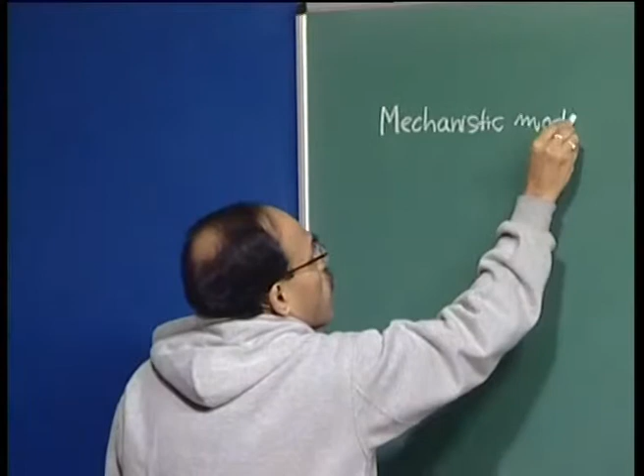Now, how many types of mathematical models do we generally encounter in steel making? Broadly speaking, we would say that we have a mechanistic model, and empirical models.

There are many subdivisions possible, because empirical models, for example, can be classified based on the standpoint from which they have been derived. For example, I can derive an empirical model purely based on regression analysis, a term I hope you've heard. On the other hand, I can derive an empirical model based on some dimensional reasoning or dimensional analysis, as well as some experimental data.

Finally, I can derive the empirical model also from the viewpoint of an artificial intelligence procedure or technique, such as applying genetic algorithms or artificial neural nets. So many further subdivisions are possible.

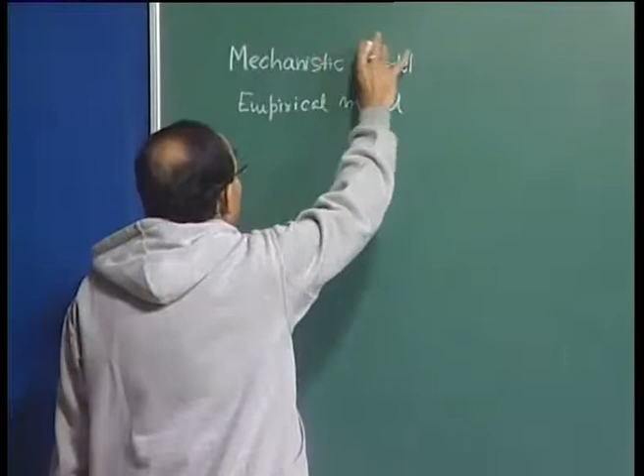Mechanistic models, for example, can be derived from various standpoints. These are basically based, as the name suggests, on certain conservation principles. People may subdivide mechanistic models further, and it has a different kind of connotation in the context of population balance, but nevertheless we would be talking about some conservation principle, some balance principle.

On the other hand, empirical models are derived purely from an experimental standpoint, embodying experimental data. The further subdivisions of mechanistic models I am not going to discuss here, as that is not of our immediate interest. We will consider models under only these two categories: either a mechanistic model or an empirical model, as far as we are concerned.

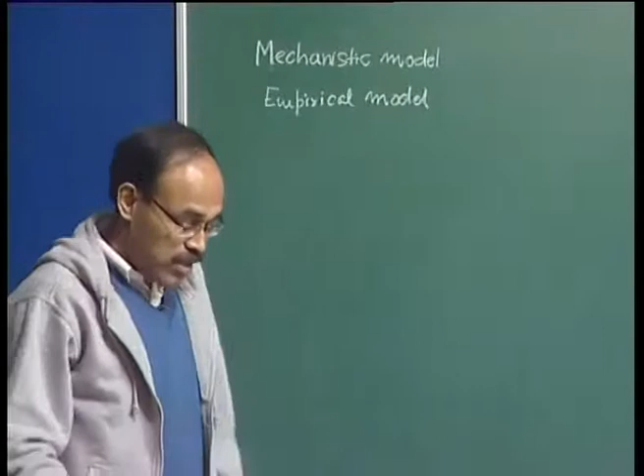Now, mechanistic models, for example, are based on the conservation principles. Conservation of what? Conservation of mass, conservation of momentum, conservation of energy, conservation of population balance, and all these kinds of concepts can be used to formulate the model.

Because mechanistic models are based on solid scientific principles, as the name itself indicates, the fundamental laws of physics these models are based on. Therefore, a mechanistic model formulated in India will equally work in other countries, provided we have been able to derive the model realistically.

But an empirical model which we may develop, which may be specific to a particular plant, may not work for all different plants, because empirical models contain experimental data points that are specific to a given plant or given set of conditions. So they lack universality. On the other hand, mechanistic models are sufficiently general, not governed by geographical boundaries, and they work across geographical boundaries, provided we can formulate them correctly.

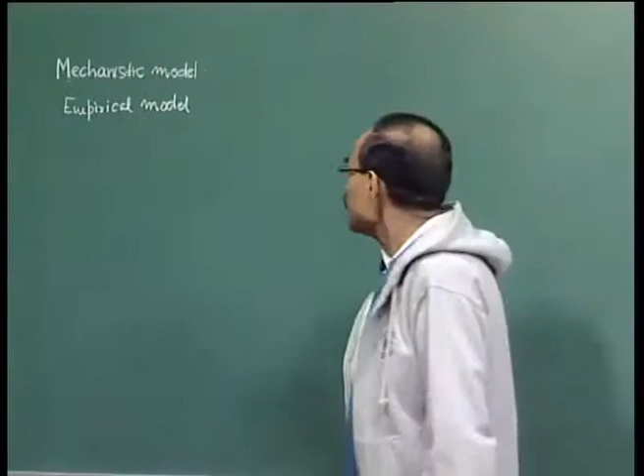For example, I can say that we can carry out a heat balance and write a heat conservation equation, which can be a very complex equation in terms of the geometry or the process itself, not a simple one-dimensional equation. So I can write a heat conservation equation and say that this represents the mechanistic model for a given process. Empirical models, on the other hand, basically look like algebraic equations, while mechanistic models most of the time will appear to us as partial differential equations. As we discuss this further, it will become clear to you.

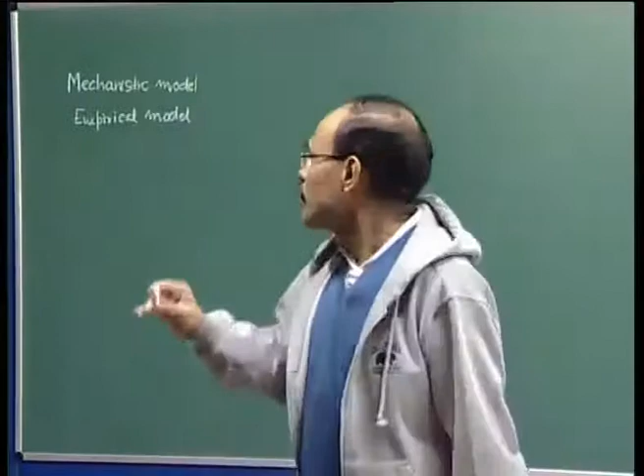Now, I have also indicated that when we try to develop a mathematical model, we have to first define the problem, what we want to develop. So merely saying I want to develop a model for a ladle, or for continuous casting, is not enough. The foremost, the most important task, is the problem identification or problem definition. This is the first step in mathematical model building.

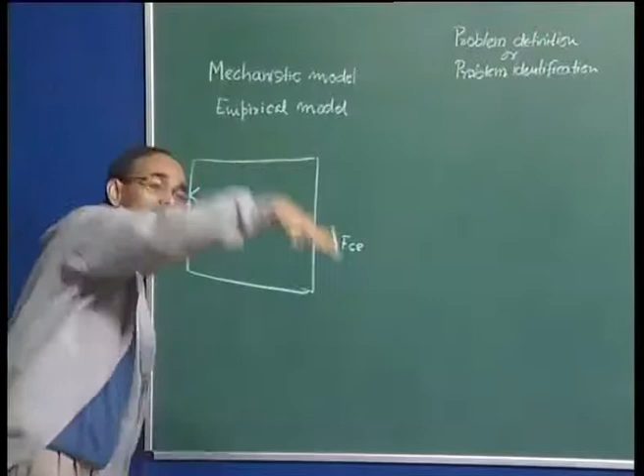Let me illustrate this with an example. Suppose I have a furnace. This is a furnace chamber. Suppose it is a gas fired furnace. So, you have burners from all sides. This is the top view, I am looking from the top. So, that is the cross section of the furnace, and we are seeing that there are burners here everywhere, okay, from all sides. These are gas burners, and

my objective could be I have a slab which is sitting here, which is a continuously cast slab. I have put that slab, and the interest here may be to find out after what time following its insertion the slab will attain a certain temperature, because once you have continuously cast slabs formed, you take them after some time gap into a reheat furnace, heat them up, bring them up to the recrystallization temperature, soak them in a furnace so that they are homogeneous, and then you transport them for further processing in rolling mill, etc. Okay. So, therefore,

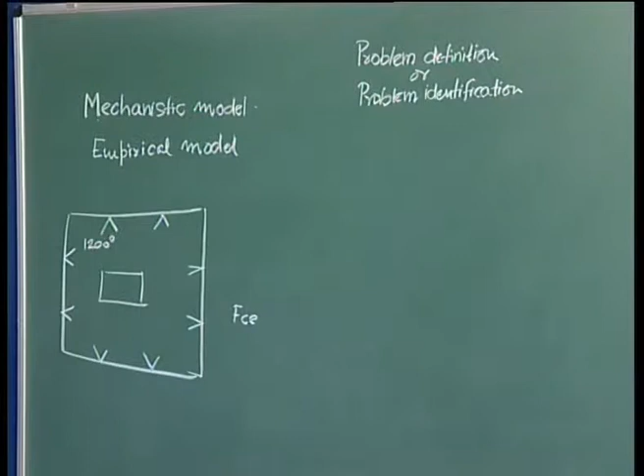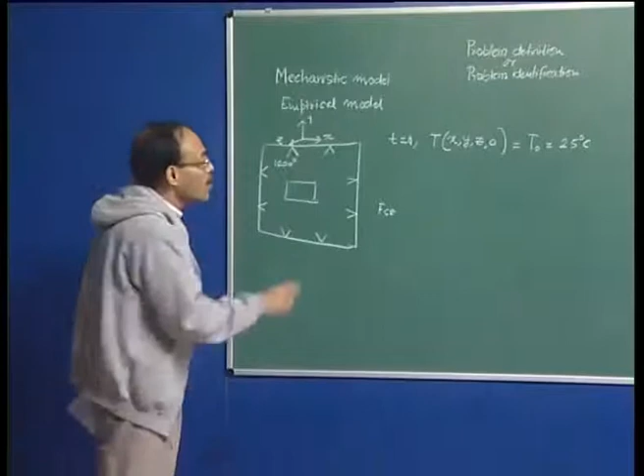I may have a furnace which may be running at a temperature of 1200 degrees centigrade. I may have inserted the slab at a time t is equal to 0, when the slab temperature may be everywhere, all points, because this slab is a 3-dimensional geometry. So, temperature at x for all values of coordinates, if I define the system by x, y and z coordinate system, okay, in that case it represents that at t is equal to 0. So, that is what it is, x, y, z and t, the temperature everywhere is T0, which may be say 25 degrees centigrade. That means, the slab under question, I have kept it following continuous casting in the bay area, and it has cooled down to room temperature, and now I am putting it back into a reheat furnace, and I want to find out the time, at what time I do not know, for all points the temperature becomes

say 1180 degrees centigrade, just putting a reasonable value. So, I want the slab to be homogeneous, okay, in terms of its temperature, that everywhere at some point of time the temperature is going to be 1180 degrees centigrade. I want to find that. One way would be to direct the radiation pyrometer through some windows onto the surface, but then the radiation pyrometer will give you the surface temperature. You will not be able to find out what is the inside temperature, whether the slab is all through homogeneous or not. So, the problem definition is clear here.

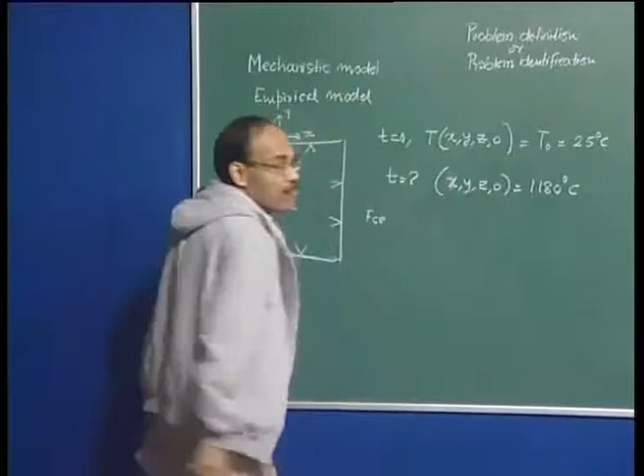I want to find out the homogenization time for a given slab inserted with an initial temperature field to obtain a final temperature all through of about 1180 degree centigrade. So, this is the problem. Now, once I have identified the problem, next comes the stage of what is called conceptual modeling. So, the definition, and this is the most important part actually, is the problem definition, identification. How clearly can you define the problem? The more certainty you have in defining the problem, the easier it will be to formulate the mathematical equation.

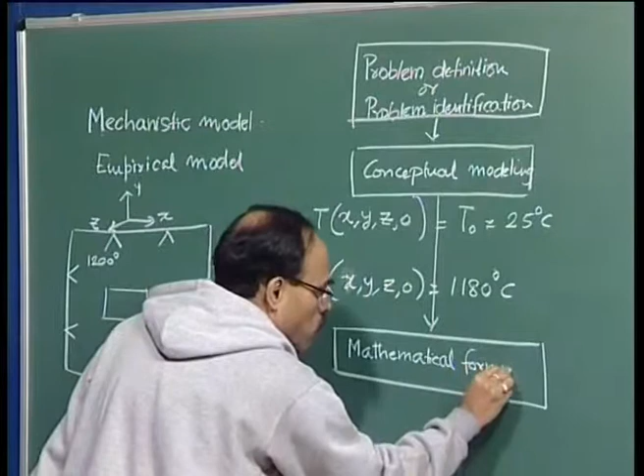Then it is conceptual modeling. Conceptual modeling is a stage which is before the formulation. So, after this we have mathematical formulation. Before mathematical formulation, before you can write down the equation that describes the temperature within the object, and if I solve this equation, which is essentially an unsteady state equation, unsteady state because it is time dependent, and it is a 3-dimensional equation that we are considering. We are talking about heat flow in the system. So, we are talking about thermal energy conservation.

So, therefore, before we can formulate the equation, in which coordinate system we will write the equation, how many terms the equation will contain, all these things we have to decide with a little bit of conceptual modeling, which is a very important part. For example, in conceptual modeling, you will try to address that, well, I have the furnace, I have the slab geometry, what is the coordinate system that I would like to use. For example, equations would be derived depending on the geometry. Maybe you have a spherical geometry, maybe you have a cylindrical geometry, maybe you have a Cartesian geometry. So, based on that you are going to derive the equation. So, you can say that, well, is the object really a 2-dimensional object or is it a 3-dimensional object.

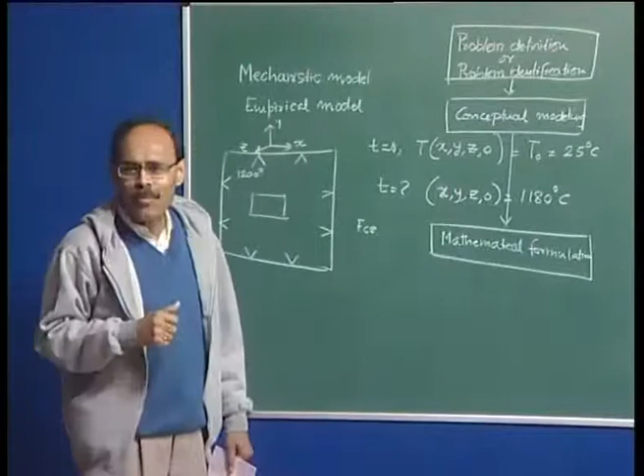Thirdly, you can say that, well, how do I solve this problem? Do I have to really solve the temperature here also within the furnace environment and within the solid also? Or can I just assume that the furnace temperature everywhere is 1200 degrees centigrade, heat is being transported to the surface of the solid slab by radiation, and then I formulate the problem. So, a series of questions need to be asked in order to get a complete picture of what you are really looking at. And it is only when you have done this that you are in a position to write the governing equation, or you can formulate the problem mathematically.

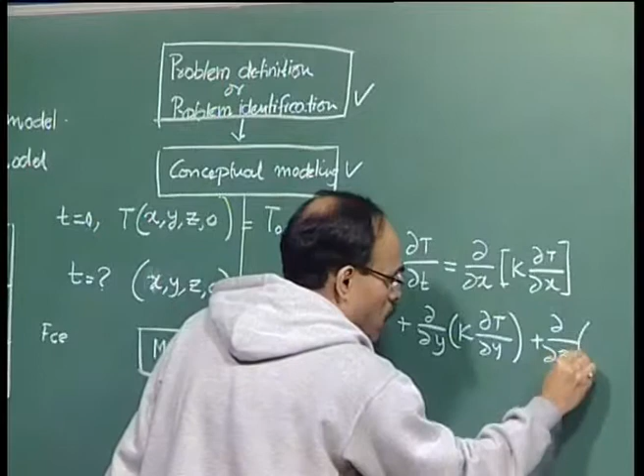For example, I can go in the reverse direction. If I write down that, well, the equation goes something like this. This is the heat conservation equation, and then I write this particular equation. These are the transport of heat through conduction within the solid. So, this is conservation of heat energy within the solid.

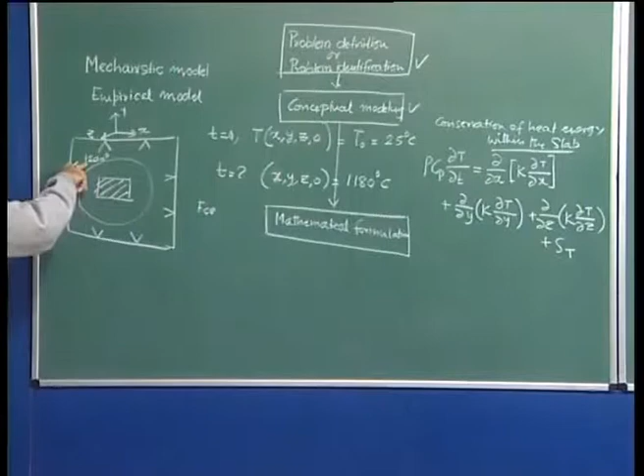This is the unsteady state term, because the temperature initially is 25, it is gradually changing and approaching the 1200 degree mark. So, this is the unsteady net rate of accumulation, this is the conduction along the x direction, this is the conduction along y direction, conduction along z direction, and then we have the source term. So, once I write this equation, you will immediately know that, well, I am considering an unsteady state phenomenon, I am considering a 3-dimensional phenomenon, 1, 2 and 3, and I am also considering that there is a finite heat source term in the system.

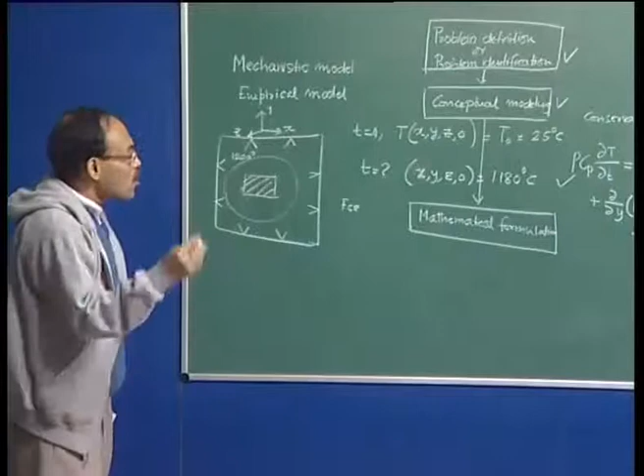For example, this may initially be ferrite pearlite steel, plain carbon steel containing ferrite and pearlite, and we know that when we heat the sample, the ferrite and pearlite will combine in certain proportion to give rise to austenite. So, a solid state phase transformation reaction may take place within the solid, and that reaction may produce some amount of heat, and that heat must be accounted for in the governing equation. So, looking at the equation, you can backtrack and find out for what conditions you have written it.

Similarly, if I go in the reverse direction, I say unsteady state equation, I consider a 3-dimensional phenomenon, I consider a Cartesian coordinate geometry, I say that this conduction is taking place only within the solid. I am not bothered about the surroundings, because my objective is to find out the time for the slab to attain a temperature of 1180 degrees centigrade. So, the surrounding is not of my immediate interest, it is the solid object which is of my immediate interest. Therefore, I can say Cartesian coordinate, 3-dimensional, source term, unsteady state problem, and then the task becomes simple. It is an unsteady state 3-dimensional heat conduction with a finite source term.

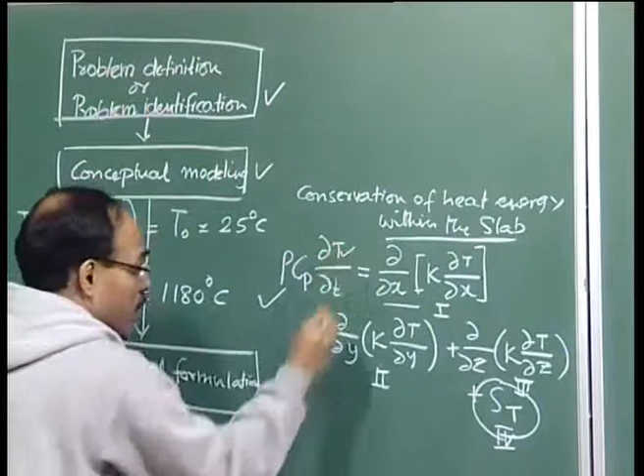Of course, as a modeler, you now have to provide an expression for ST. You must understand this represents only one equation, and hence we can at the most have one unknown, and the unknown here is the temperature, which, as the equation indicates, is a function of x, y, z and t. So, we will have to have some expression for the source term, and this source term itself may be temperature dependent. If you remember the iron carbon phase diagram, you can look at the tie lines and find out that the proportion of austenite will change depending on what temperature it is. So, this ST is actually a function of temperature. Therefore, this is a non-linear heat source term, because unless you know the temperature, you will not be able to predict or solve this particular equation.

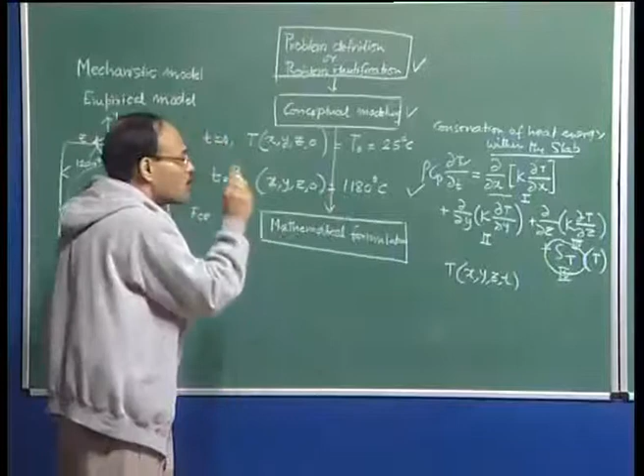So, as far as the formulation is concerned, we can now formulate the problem. I am going to come back to it, but note that because we are talking of a mechanistic model, and mechanistic models always give rise to partial differential equations, we have to not only write down the equation, but we have to provide the boundary conditions also. The formulation essentially implies that we have to write down the governing equation and the corresponding boundary conditions, and only then is the statement of the problem complete. Only then can we say that yes, we have been able to formulate the problem correctly.

This exercise can be taken, for example, in the context of ladle metallurgy. You can say that I have a ladle gas injection procedure, and what I want to model there is this: I have added a solid ferroniobium, and I want to find out after what time the ferroniobium gets completely dissolved in the steel bath. So, your problem definition is complete. Now, you have to look at the slag contents.

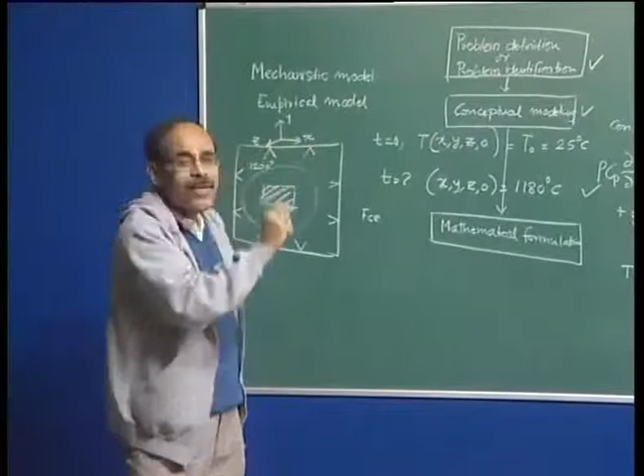Next, we go to the conceptual modeling. It is a cylindrical system, but the plug is located away from the axis of symmetry. So, it is basically a 3-dimensional problem, and it is a multi-phase problem. I have gas injection, I have a slag layer, I have melt. Do I solve it as a multi-phase problem? Do I solve it as a steady state problem or an unsteady state problem? All these questions you are going to ask.

Having conceptually modeled the situation, I can say that because dissolution is a mass transport phenomenon, I have to have the flow in the system known. Therefore, I have to solve the fluid flow equation. Having obtained the flow, I will solve the mass transport equation, because dissolution is a mass transfer phenomenon, and that is the way we are going to formulate the problem.

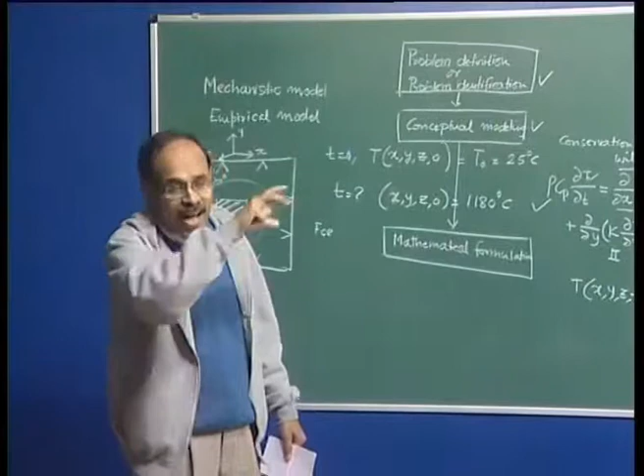Once we write the conservation of momentum or fluid flow equation, and the conservation of mass or mass transport equation, we will write the boundary conditions, and then we will say yes, we have been able to formulate the dissolution of ferroniobium in steel in a realistic manner, because we have written down the corresponding differential equations, which we call the governing equations, together with the boundary conditions. Once you have the mathematical model formulation, we are going to solve these equations. Solution is very important for us, and we will discuss this in detail later on.

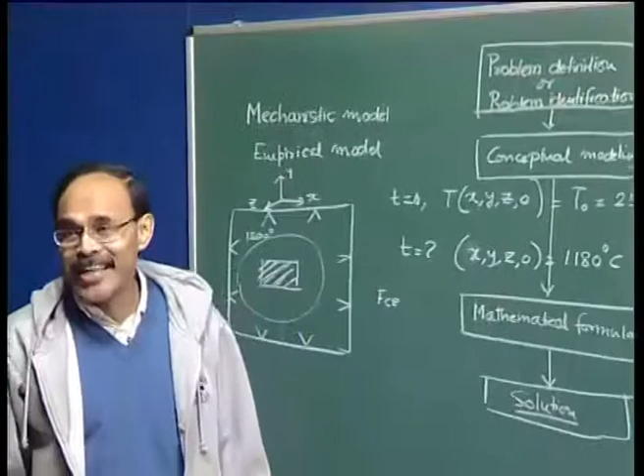Solution, because these partial differential equations, in most cases, you will not be able to solve analytically. Analytically means, suppose you have solved many differential equations, non-homogeneous equations, using complementary functions, simple ordinary differential equations, even unsteady state equations through product solution techniques and error function solution techniques, which can be solved by hand. But these equations cannot be solved by hand. If you are given a pen and paper, you will not be able to solve these equations. You have to resort to numerical techniques.

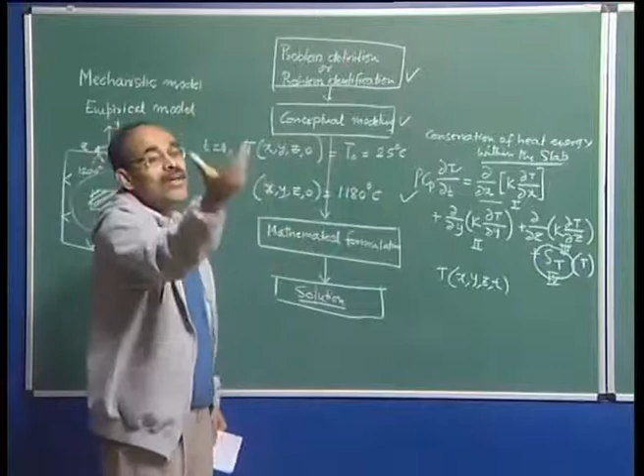What does a numerical technique do? A numerical method basically converts a differential equation into a set of algebraic equations, and then we solve those equations. So, the purpose of the numerical method is to convert a given differential equation into the corresponding algebraic equations. Once we have a large number of algebraic equations, of course we require a digital computer, otherwise we will take a very, very long time to solve it. The set of algebraic equations can be solved with the aid of a suitable solution algorithm, or a computer platform or computer program, whatever you may like to say.

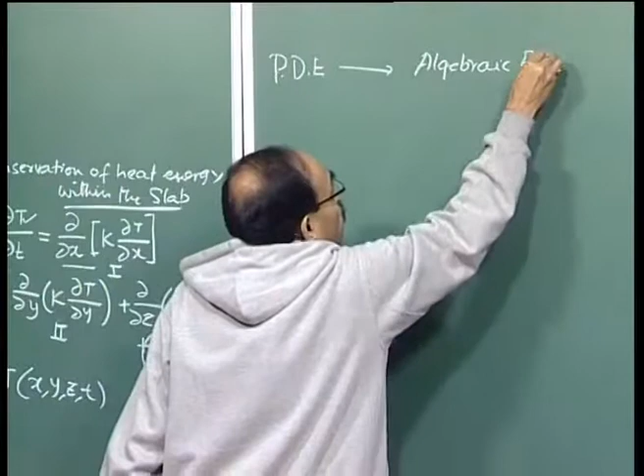So, a partial differential equation, PDE, gets converted to algebraic equations in the solution. Not just one algebraic equation, many algebraic equations, and what connects the two is the numerical method.

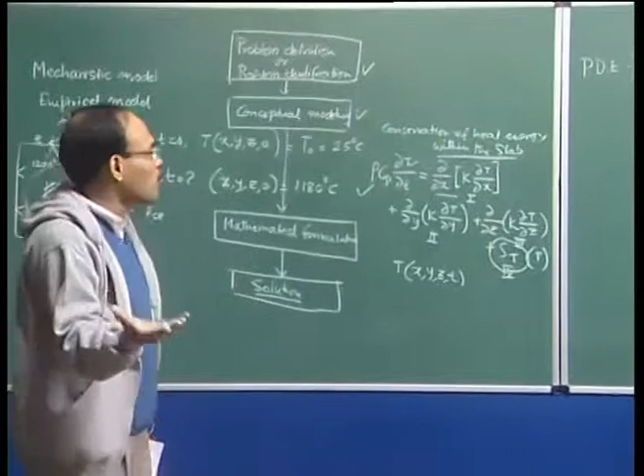One important point I would like to make is that there are innumerable numerical methods available by which you can translate a partial differential equation into a set of algebraic equations. Therefore, the form of the algebraic equation is going to be different depending on what kind of numerical method you have applied. For example, if I take a differential equation and use Taylor series approximation, I will get one type of algebraic equations. If it is an ordinary differential equation, there are innumerable algorithms, like the Runge-Kutta method, the Runge-Kutta-Gill method, second order method, fourth order method, Adams-Moulton method, so many, and in each case the final algebraic equation looks different.

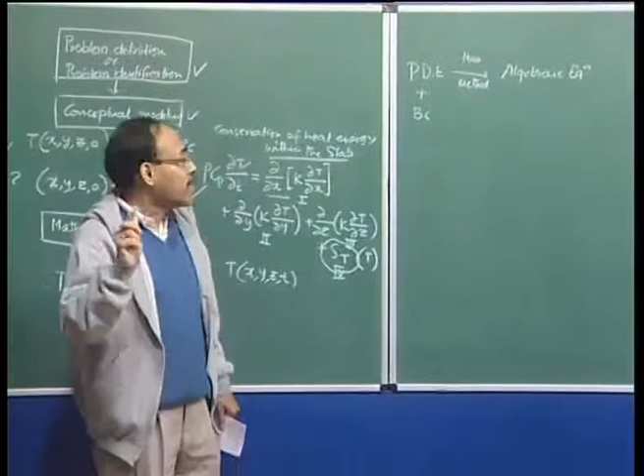Therefore, the solutions of the algebraic equations are also going to be different depending on what sort of numerical method we apply. But we must understand that the partial differential equation together with the boundary conditions defines a problem explicitly, which implies that we have to have a unique set of solutions. Since I have said that different numerical methods will produce different algebraic equations and hence different solutions, this seems to contradict my statement. But mind you, when we convert the differential equations into algebraic equations, we solve the equations at discrete locations in the system, which we call the various nodal points.

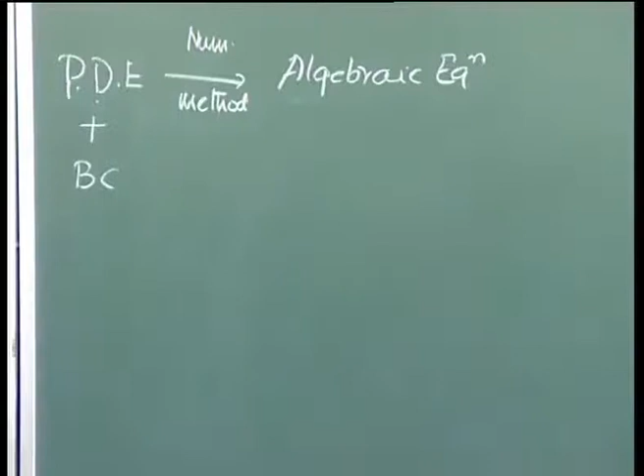So, when a large number of nodal points is used in the system, or the resultant number of algebraic equations is very large, in that case the solution, despite having different numerical methods, is going to be identical, and that solution is what we call the grid independent solution. So, when you do mathematical modeling, it is very important for us to establish a grid independent solution, which is a meaningful solution, a reflection of the solution of the differential equation together with its boundary conditions.

So, we solve the equation, and we can try now to get a certain asymptotic solution for which I have an analytical solution. For example, I have a 3-dimensional equation that I have written. Now, if I set this term to be equal to 0, that is a steady state phenomenon with no source. Then it is a pure steady state heat conduction in 3 dimensions. And if I now say that all surfaces are fixed at a certain temperature, a benchmark situation which has nothing to do with the problem, I have to understand and know that this conversion to an algebraic equation is correct, and the solution that I am going to get is a meaningful, correct solution.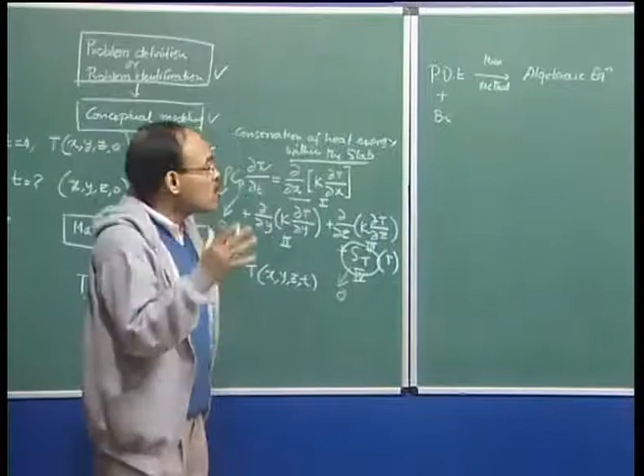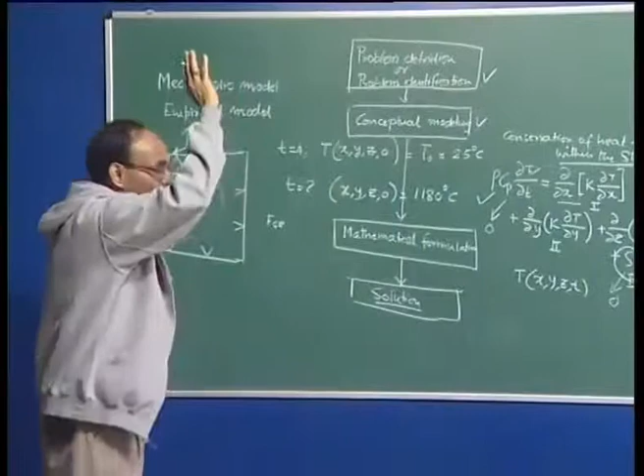How do I test it? So, under certain limiting or asymptotic situations, I am going to solve these equations. A typical benchmark or limiting situation is that we write down the complete model, based on the conservation and the solution techniques, and we say that in the computer program or platform, let us set this source term to be 0, and consider a steady state situation by setting this to be equal to 0. We then find that the problem converts to a steady state 3-dimensional scenario, and if we further assume that all surfaces are maintained at a constant temperature, need not be the same, then an analytical solution to this particular problem is possible, which is given in standard heat conduction textbooks. So, I can run my computer program, solve the equation, and for this particular limiting situation, compare with my textbook solution.

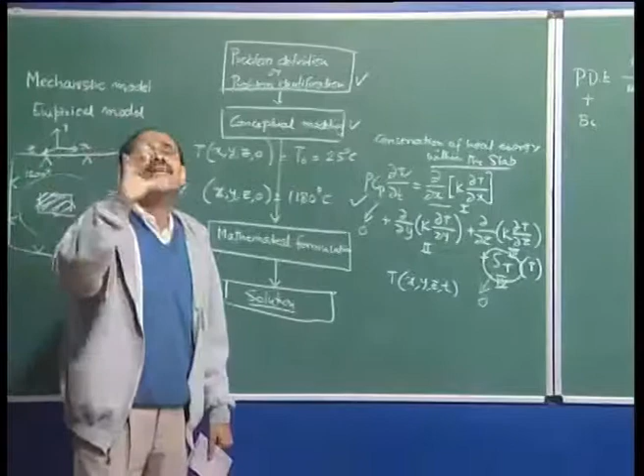Then I can say that there is a reasonable certainty that the programming I have done is correct, because it is able to replicate many such solutions given by other people or other sources. We can also say that I am not the first person to solve this equation. There may be many other people who have solved these equations for different cases or different boundary conditions. So, I can also run my computer program for situations which have been relatively well investigated and reported by previous investigators, and then I can say that the computer program produces estimates of temperature that agree well with those reported by various other investigators. So I have some confidence that the computer program or solution methodology that I have developed, following problem definition, conceptual modeling, and mathematical formulation, is indeed correct and gives reasonable estimates.

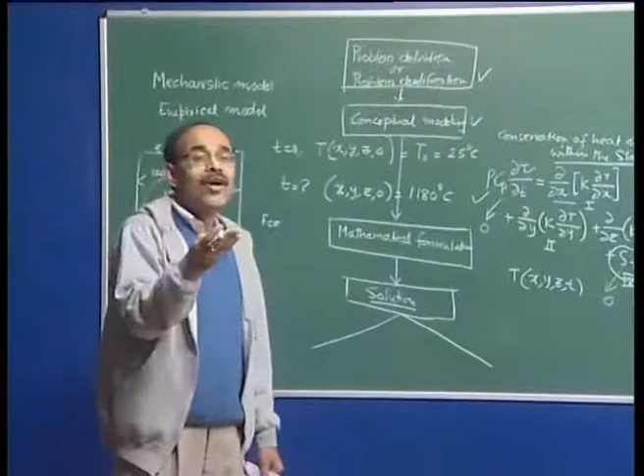So having obtained some confidence about the numerical solution technique, I am going to bifurcate, and in one stream I am going to run this program in its entirety. Now, no more asymptotic solution. So I am going to use the exact equation which I have written, and write down the exact boundary conditions. Of course, I am not talking about it in detail, but we know that every differential equation will have some boundary conditions and initial conditions. For example, if you integrate a simple second order ordinary differential equation, you will get two constants of integration. How do you derive those constants? You obtain them from the boundary conditions.

So similarly, we will have 7 boundary conditions attached to it. There is a second order term, so 2 conditions on x, 2 conditions on y, 2 conditions on z, and 1 condition on t. So with 7 conditions embedded, I should be able to solve the exact problem that I have identified in the beginning. So I can solve the problem.

Industrial simulation.

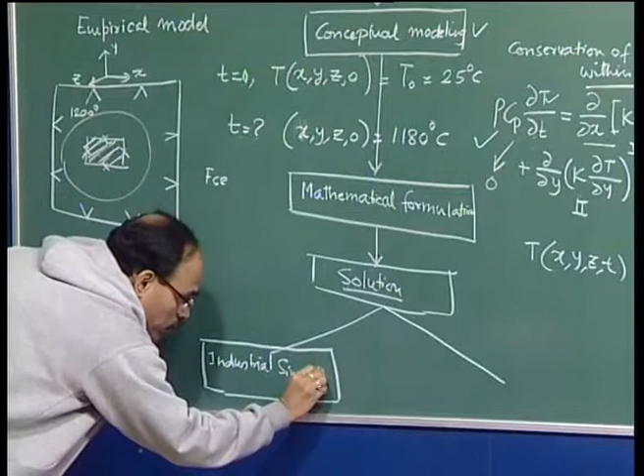At the same time, when I do industrial simulation, I have been able to find out that the inside temperature is this, the outside temperature is this, at various times. So I want to check whether my results are correct or not. So in parallel, along with industrial simulation, I can carry out some

experiments. So I can use techniques to determine the surface temperature, for example, and then I can compare the two. So these experiments can be carried out, for example, maybe with a contact pyrometer or maybe with an optical radiation pyrometer. So I can measure from a distance what the surface temperature is at a certain time.

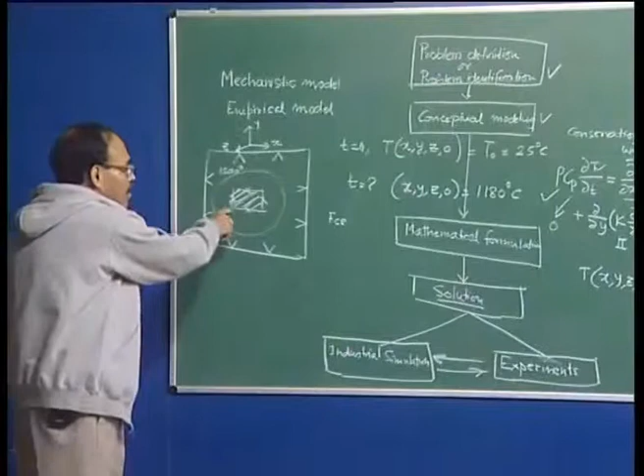The model can also predict, once you do the exact simulation of the industrial process, the time-temperature history at various locations. So this comparison will give us an idea whether our model has been correct or not. As I have mentioned to you, there may be many assumptions involved in formulating the governing equation and the boundary conditions. For example, for this heat source term, we can make various kinds of approximations in order to formulate how the heat is liberated because of the solid state phase transformation.

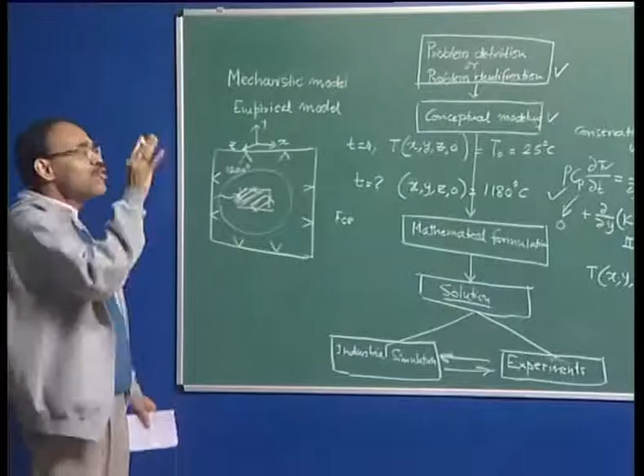Also, I can formulate the transport of heat from the surrounding to the surface, whether it is by convection or by radiation, what the heat transfer coefficient is, what the emissivity of the surface is. Many assumptions may be there, many idealizations may be there. So we are not expecting a one-to-one correspondence between the experiments and industrial simulation. There is going to be some amount of uncertainty, and therefore it is always desirable, as I have mentioned, that models without measurements are incomplete.

So in any sensible investigation we have to have experiments and model simulation in parallel, and this will give us some idea of how realistically we have been able to formulate the model and the boundary conditions. At this point, we may find that some tuning may be necessary, because we have made some assumptions and some idealizations. So there is some discrepancy or difference between this and this. So in order to match the predictions with experiments, we call it force fitting.

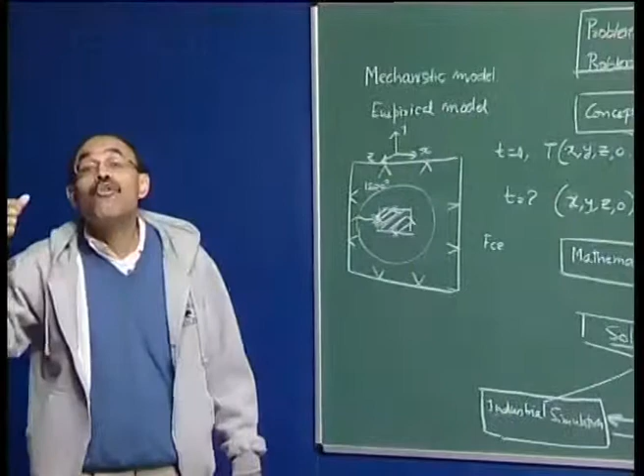So now we find out that, say at a given location, capital X, y, z, at a certain time t1, it varies as a function of y, z and t. So I can say that at this particular location, suppose the temperature varies something like this. This is my prediction.

I would write it like this. This is the other way. Let us fix y, let us fix z, as a function of x and as a function of t. So, for the fixed value of y and fixed value of z, as a function of x and t, I am plotting the temperature. So this is actually T at a location x as a function of time. This is my prediction, and I can find that my measurements are going like this.

In that case, it may be possible to do some tuning and bring all the points a little bit closer. And I can find out that now my points have become like this. So I am forcing the model to correspond to the actual observations. And what are the reasons for this difference? My actual measurement is here, while the line goes something like this, and the actual measurements are different from the line because we have some idealizations and simplifications in formulating the model.

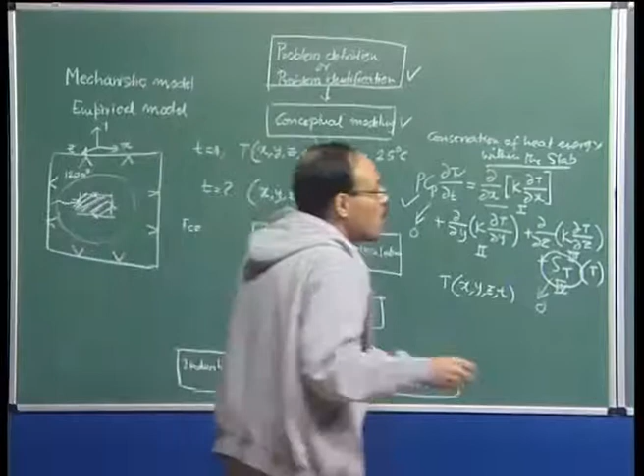So now this is not going to be a very realistic model. Therefore I want to bring this closer. These are the actual measurements, and this is the line that I have predicted. For example, I can move this line a little bit here. So there is evidently some difference between the experimental points and the model line.

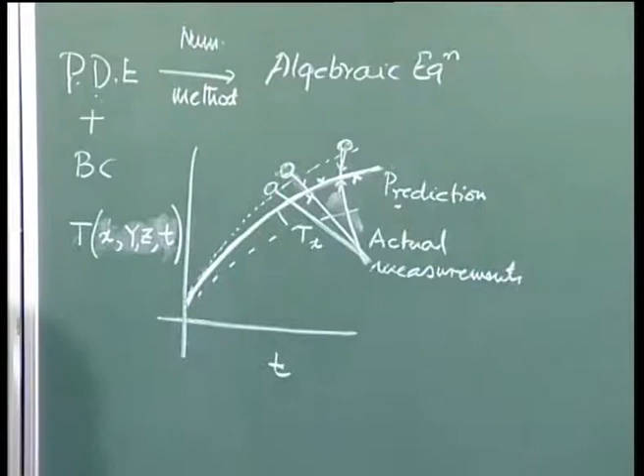Now, I cannot change these, they are actual measurements. These points cannot be altered. But I can change the model: the line can go, I can bring it here by changing certain parameters, for example, changing thermal conductivity, changing boundary conditions, changing the source term. I should be able to change the prediction, take it up or take it down. This stage of bringing the prediction closer to reality is termed force fitting, and this is the tuned model.

So, in many cases model tuning is going to be necessary because we have made a certain amount of idealizations. Whether tuning is necessary or not, these two steps are going to determine it when you do industrial simulation, when you carry out experiments, and we find that there are large differences between the two. In that case, we will tune the mathematical model, introduce some fudge factors, adjust the heat transfer coefficient, adjust the thermal conductivity value, manipulate the source term in order to get better correspondence with the experimental measurements.

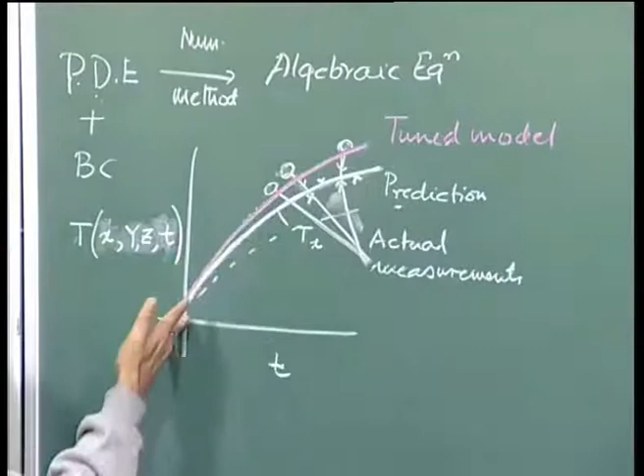And this purple color line shows that now with model tuning I have been able to get the trend of the actual variation fairly realistically. So, I say it is now an industrially tuned mathematical model, and this mathematical model is now all set for implementation on the shop floor for doing process analysis, design, optimization, whatever you would like to consider. Now, coming back to this particular issue.

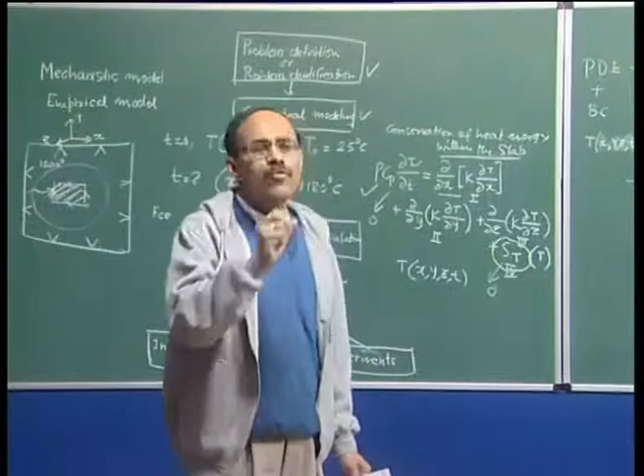So, how the models are formulated has been discussed. Now, we understand that in many cases tuning of the model is going to be necessary. I want to elaborate on this. There are many cases when we can formulate the equations exactly. For example, if I have a pipe flow problem, flow of fluid through a pipe, I can write the exact equation, I can write the exact boundary conditions, absolutely no problem. I can get an analytical solution, and in that case I will find that analytical and numerical solutions will match exactly with the experimental observation.

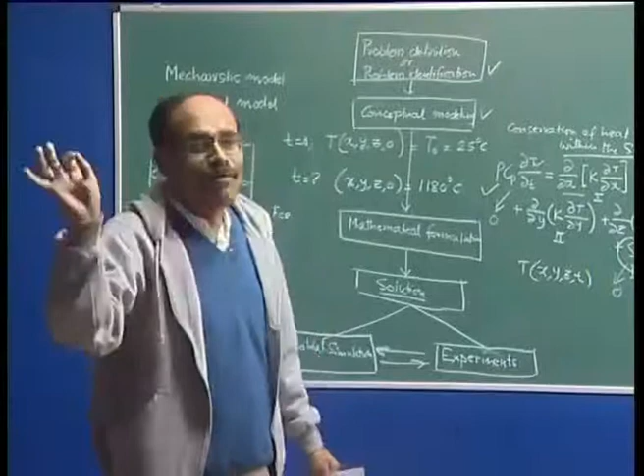Suppose I measure the velocity with a laser Doppler velocimeter. If it is a transparent tube, then I can measure the velocity with a PIV. I can measure the velocity with a hot film anemometer. I can compare with my numerical model for fully developed flow through a pipe. There is not going to be even a little difference between prediction and experiment. Prediction and experiment will match in toto. There is no question of model tuning coming in.

So, therefore, we can see that there are certain physical situations for which we can formulate the problem exactly. We can write down the governing equations correctly, and there will be no problem as far as matching of prediction and experiments is concerned. So, this is the first category of problem. The second category of problem is where our understanding is not complete. So, many idealizations and approximations will go into model building.

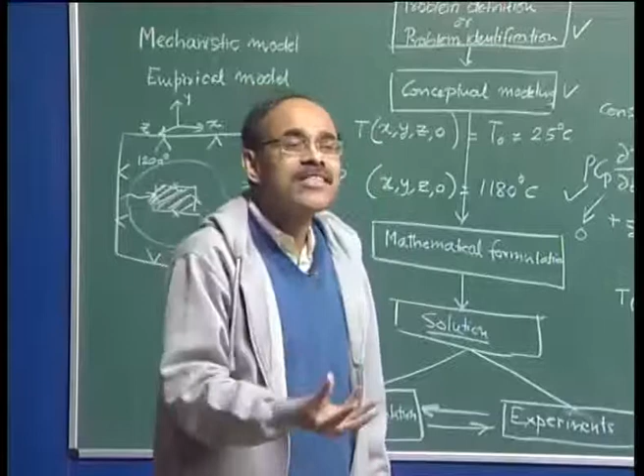In that case, what happens? We will invariably expect that the model predictions and experimental observations will not match, because our understanding of the physical scenario or the physics of the process is not totally clear. For example, when you inject argon gas through the ladle, how a gas envelope forms around the orifice, how it develops into a plume, how the big gas envelope breaks up into a number of bubbles, how the bubbles coalesce during their rise or disintegrate. This complete picture we understand reasonably, but the picture is not absolutely clear as of today.

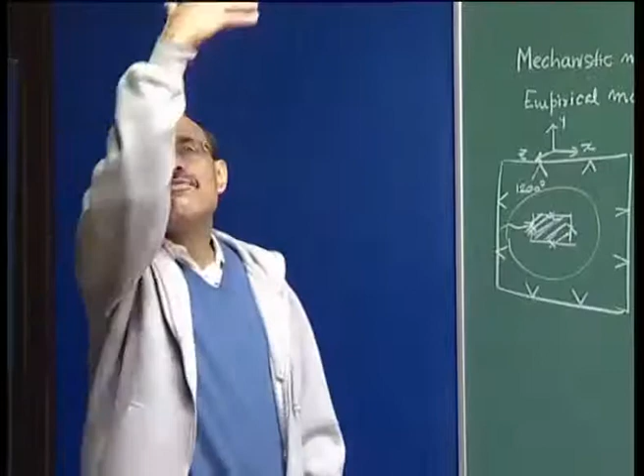So, if I have to write model equations for this particular phenomenon, the injection of gas, the formation of a big gas envelope, its break up into a number of bubbles, the coalescence of the bubbles into a bigger one, incorporating all these phenomena, if I have to write down the model for bubble size distribution, we will see that there are going to be a lot of idealizations and assumptions.

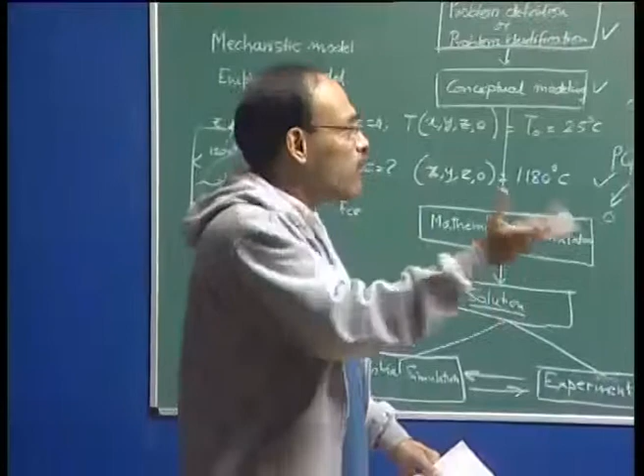In the secondary cooling zone of a continuous caster, for example, if I want to develop a mathematical model for heat transfer coefficient from first principles, there also we will see that our understanding is far from complete. You have a nozzle through which spray mist is coming. What is spray mist? It is air and water. The spray mist comes, and this is the surface of the billet, and the spray mist impinges on the surface, and in the process it breaks down into a number of droplets, impinges on the hot surface, and removes heat from it. So, this process is extremely complex, and our understanding of droplet formation, breaking of the continuous stream into droplets, impingement of the droplets, evaporation, etc., at the surface is far from complete.

As a result, when we try to formulate problems for these scenarios, we will see that a considerable amount of idealizations and approximations will go into model building. Unfortunately, steel making processes fall in the second category.

Steel making, mathematical models of steel making are not going to be like pipe flow problems, where we can write down the equation exactly, that we can formulate the governing boundary conditions exactly. No, we will never have this kind of scenario in steel making, because of the inherent complexities of the subject, because of the nature of the manufacturing technique.

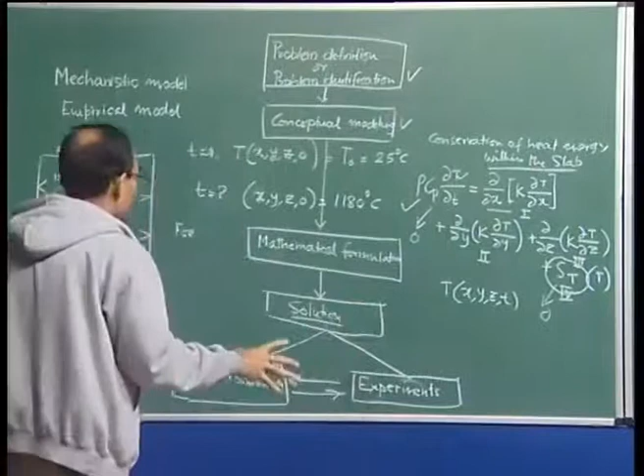So, it is to be appreciated at this stage that when you build models for steel making processes, inherent problems, inherent idealizations are going to be there in the formulation of the governing equations. Idealizations will be there in terms of formulating the boundary conditions and the initial conditions, and all these are going to be a matter of concern, giving us some deviation from experimental observations.

People in industry today say that if your model can predict within plus minus 20%, 25% of what we see in the industry, we will consider your modeling to be reasonably good. So, that is the kind of range or tolerance we are given because of lack of complete understanding of the subject.

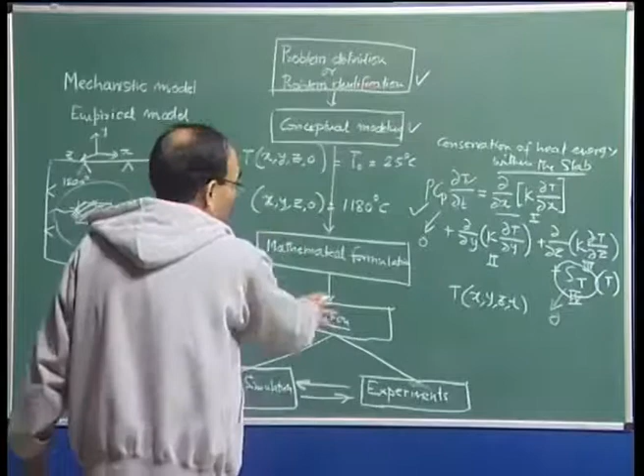Now, we can say that once we have identified the problem, we have solved the problem, we have tuned the problem. Now, we are in a state that yes, we have a mathematical model that has demonstrated performance.

Of course, following tuning, tuning will always be necessary in industrial optimization and industrial design. So, the mathematical model developed cannot be applied in a straightforward way. Without companion experiments, we will never know the extent of tuning which is necessary. So, I have been repeatedly telling that merely solving governing equations and boundary conditions are not enough.

This is called black box modeling. We have to have companion measurements in order to demonstrate the applicability or suitability of the mathematical model that we have been able to formulate.

Now, let us look at the issues of uncertainty. As we have tried to indicate so far, the formulation of the model as well as the boundary conditions are going to give rise to some amount of uncertainty. Now, I will explain very briefly the context of uncertainty in boundary conditions.

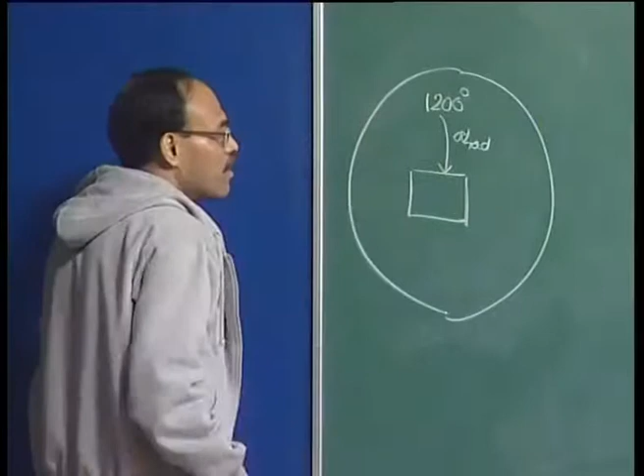For example, if I have to model that scenario, which again I will draw here, you may require to know what is the ambient temperature. Now, I can say that, well, the surrounding temperature is 1200 degrees centigrade and it is radiation which is giving heat to the slab through its surface. Now, therefore, somehow I have to know what is the furnace temperature.

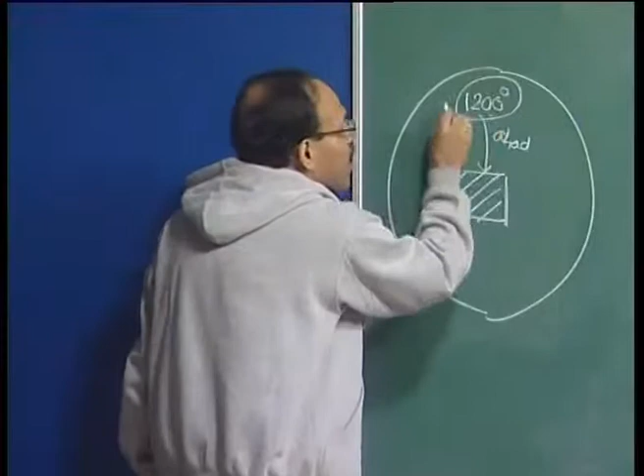So, I have to have measuring devices, and based on that I will know what is the furnace temperature. So, there is going to be some amount of uncertainty when we rely on empirical measurements for the boundary conditions. This surrounding temperature, needed as a boundary condition when solving for temperature within the solid, how do you know it? By carrying out certain experiments or with some temperature controller or pyrometers, etc. So, therefore, those measurement devices also have some inherent errors, and certain amount of error and uncertainty is going to be associated with this.

Similarly, when you are talking of heat flow, modeling of heat transfer in the melt, we require that the difference in temperature here is a result of Q loss. So, we must know at what rate, through the refractory lining in the ladle, heat is being lost outside. How can you know this? There is no way of determining it theoretically. We have to put a probe here, either we measure temperature or we directly measure the heat flux through a heat flux transducer, and then tell you the rate at which heat is being lost.

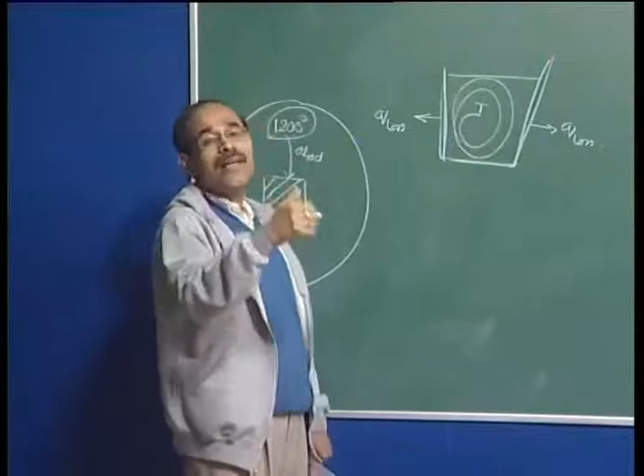So, when I write the governing differential equation for heat flow within the melt, this information will appear as boundary conditions to the governing equation, and these boundary conditions will be directly based on experimental observations. So, when you measure these quantities, either the temperature within the furnace or the rate of heat loss through the steel shell in a ladle, these are all empirically determined parameters, prone to error because of inherent problems associated with the measuring devices.

So, we understand that uncertainties are going to arise, number one, from uncertainties in formulating the governing equation correctly, that I have explained. We can also have uncertainties because we do not exactly know, for example, the thermophysical properties of the system, such as thermal conductivity, and how it varies as a function of temperature and composition.

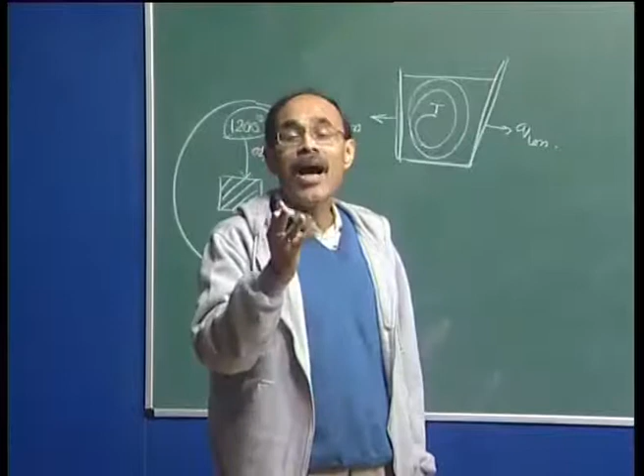If we do not know, in that case we can say that the properties of the system are not known. High temperature properties and kinetic data are not always available, so they also bring in a certain amount of uncertainty. Uncertainty in boundary condition, uncertainty in governing equation, and uncertainty in high temperature properties and kinetic data are the major sources of such differences. Okay? That is the difference that we are seeing here. So, these three can be considered to be the major reasons.

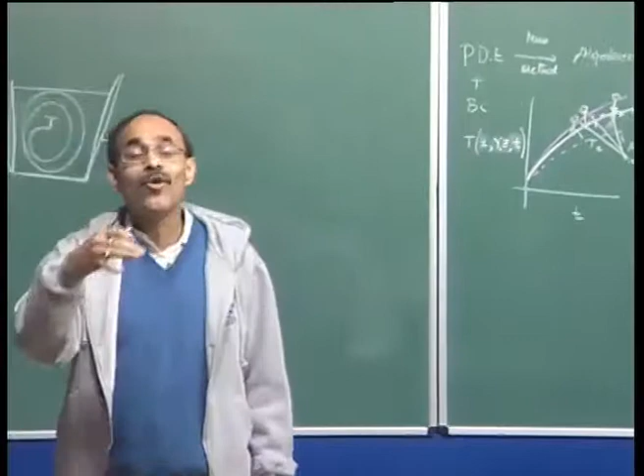We must also understand that numerical methods are prone to some error, but eventually when you hit the grid independent solution, then that can be forgotten, because grid independent solutions have to be identical. But certain numerical techniques, if you do not take precautions, can give you some erroneous results also. So, numerical error is also one reason. We have to have a robust numerical method in order to derive the solution from the governing equation itself.

Now, I have written that heat conduction equation very clearly. How do you formulate these equations? Having understood this, let us go back to this particular issue. Having said that I want to find out the temperature within the solid, then I have to write down a thermal energy conservation, because I know that the temperature at a point within the location is because of the heat which is being received and the flow of heat within the solid itself. So, it is basically a conservation. Okay? The rate of change of temperature at this particular point is a function of the rate at which heat is being lost and heat is coming from the ambient to the surface, and I should be able to write an equation for this. So, this is going to be an energy conservation equation.

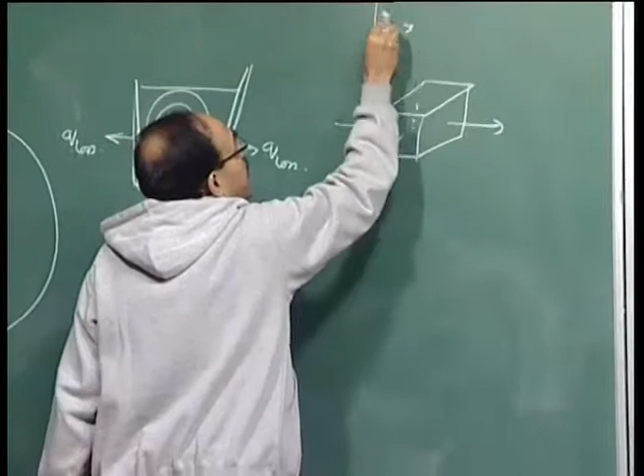Now, the question is, how do I write those equations? Do we every time derive an equation from the control volume based approach? For example, you have seen the Navier-Stokes equation, Fourier's equation or Laplace equation. How do you derive those equations? We take an elementary control volume, and through this I can say heat is coming in, heat is going out. So, this is x, y and z direction, and we have heat which is coming in this direction, leaving in this direction, coming in this direction, leaving in this direction. So, the net rate at which the heat content of this control volume changes is a function of the net efflux of heat along the three different directions.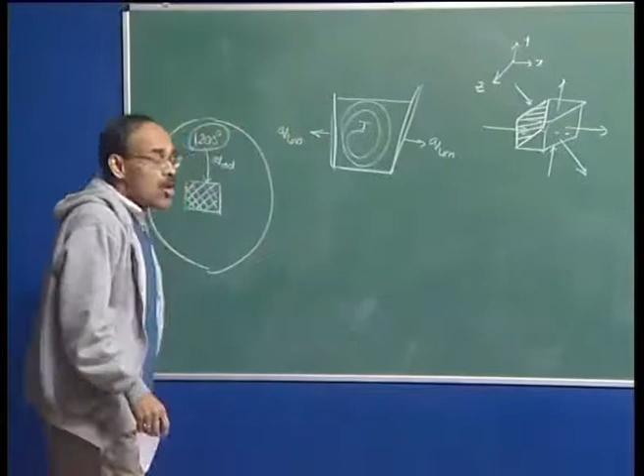So, I can set up an elementary control volume, and then I can find the characteristic conservation equation for this particular control volume. Imagine if I take this control volume to be one of the faces merging with the boundary, then that is how through the boundary control volume I will have the boundary information getting into the calculation domain. This may be an internal control volume, and within an internal control volume I know it is the conduction terms: conduction of heat in along x direction, conduction of heat out along x direction, conduction of heat along y direction, conduction of heat out along y direction, and so on. Because this is an internal control volume, one of these surfaces can very well become the boundary surface, okay, once the control volume is located here, and through that particular surface we will have the boundary information getting into the system. So, one way of deriving the model equation is that we set up the control volume and formulate the governing equation, and whatever equation I have written earlier can be derived very easily by control volume formulation.

But for every problem it is not justified to write down the control volume formulation and derive the equations, because I am not the first person to investigate heat conduction phenomena. There are innumerable other people who have studied heat conduction phenomena. These equations are documented in literature, which I have written, for example. So, I now write it in a little bit conservative form: divergence of k gradient T plus S_T. If you expand it in 3 dimensions, you get the second order derivative along x, second order derivative along y, second order derivative along z. So, these equations are well documented in the literature.

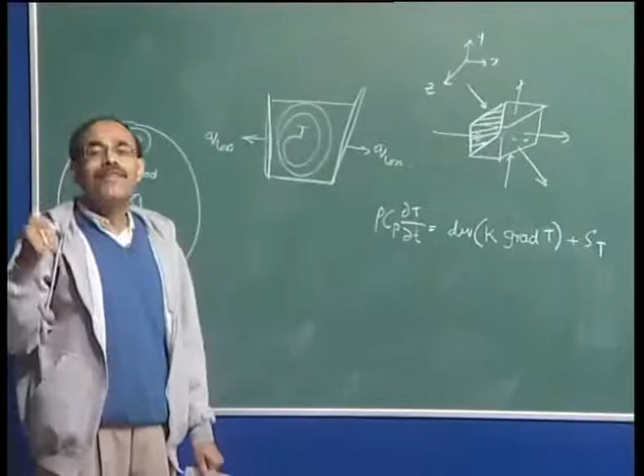Okay. Once I understand the phenomena, I can pick up that particular equation from a previous work. At the most, I can examine whether I am perhaps blindly copying this equation: is the equation dimensionally consistent, is the equation correct, is the equation the one I am looking for. So, how can you pick up?

There are innumerable equations of heat conduction. I will say two-dimensional steady state, two-dimensional in cylindrical polar coordinate, three-dimensional in Cartesian coordinate, one-dimensional in spherical coordinate. So there are a lot of heat conduction equations in front of me. How do I pick up the right equation which is applicable to me? And that is dictated by the conceptual modeling.

At the conceptual modeling itself, I am now able to see what the differential equation is that I have to pick up from the literature, so that I can altogether avoid this control volume formulation part. You can of course do this if you have time, but it is not always necessary. The equations are available in the literature. You have to understand the physical scenario and then pick up the correct equation. So there are building blocks available. This is called heat conduction building blocks.

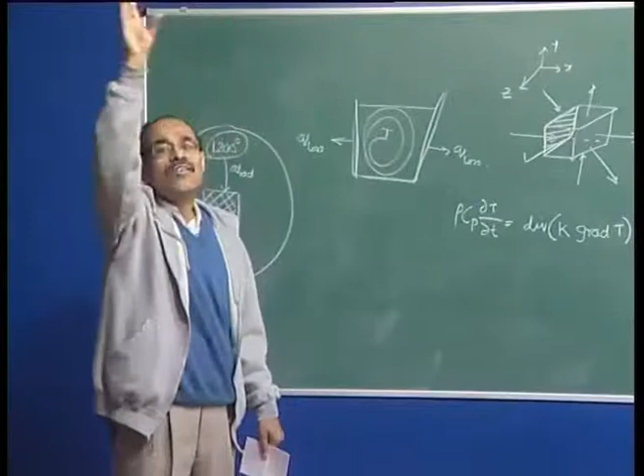So in heat conduction building blocks, what am I going to have? I am going to have heat conduction in three dimensions in spherical coordinate, heat conduction in three dimensions in Cartesian coordinate, steady state. Similarly, I can have three other equations: unsteady state heat conduction in Cartesian coordinate, unsteady state three-dimensional heat conduction in cylindrical polar coordinate, and unsteady state three-dimensional equation in spherical polar coordinate. So I have a series of equations in the heat conduction building block, and I am going to pick up the right one with my own understanding.

So, we have summarized various building blocks necessary for mathematical simulation of steel making problems. These building blocks could be, one could be a fluid flow building block. What do the building blocks contain? Building blocks contain the differential equations or the mathematical models of fluid flow.

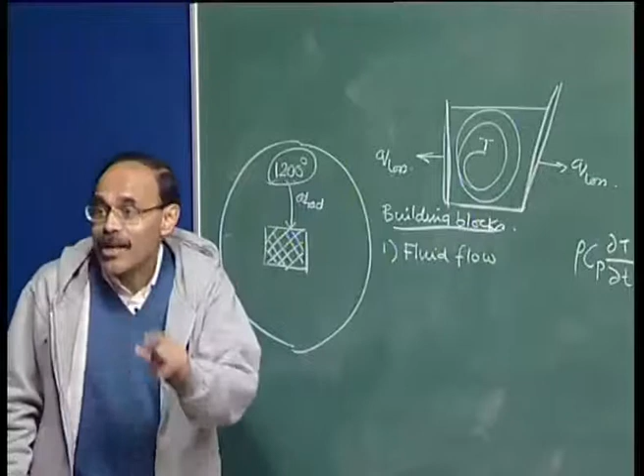Why so many mathematical models? Because they contain a set of equations written in unsteady state mode or steady state mode, written in two dimensions or three dimensions, written in various coordinate systems. That is why we have a range of choice available to us. We have to only understand that we have to simulate the fluid flow. So we have to go to the fluid flow building block and pick up the correct equation. We can have a building block for turbulence also.

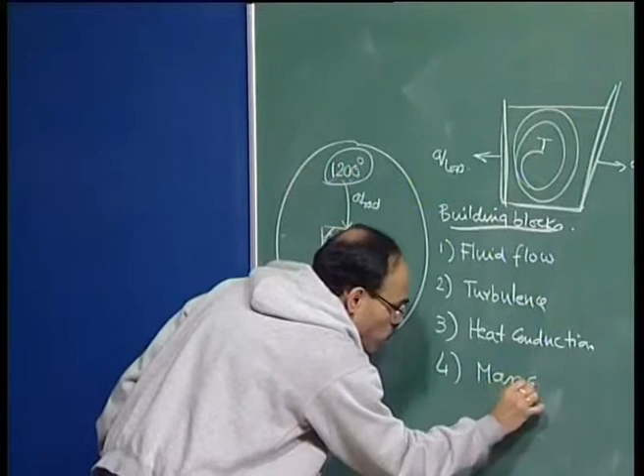There may be various types of turbulence model, as I have mentioned earlier in one of the lectures. So we can have various kinds of models. You have a choice there, what kind of model you would like to use. According to that, you can pick up the right equation that is applicable to your case. You can have the heat conduction module, which I have just now discussed, and the counterpart, you can have mass diffusion also. You can have convection diffusion. You can have magnetohydrodynamics. There are all modules or building blocks available to us, and there are many such building blocks which are available to us.

So we have to understand the problem. We have to see what we are trying to model, and accordingly choose. For example, I will just illustrate. I want to model heat flow within a ladle. Now, I understand that in the ladle there may be some fluid flow involved, because this is a liquid. So within the liquid or in the melt, transport of heat is due to convection and diffusion. Diffusion means it is heat conduction here. So diffusion is a generic term for all.

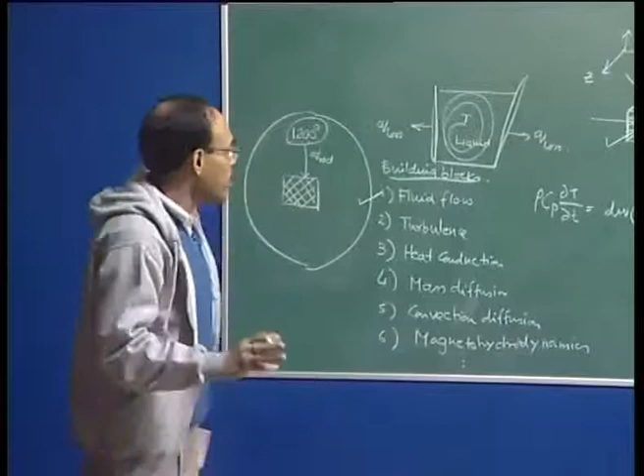We have momentum diffusion, we have mass diffusion, we have heat diffusion. So heat diffusion is heat conduction, momentum diffusion is viscous diffusion, and mass diffusion is mass diffusion. The heat will flow from one point to another point because of the presence of the fluid flow as well as the diffusion or heat conduction itself. So I will say that I need not a heat conduction module, but a convection diffusion of heat or mass. This is the building block. These are one and the same type of equations, because temperature and species are scalar quantities.

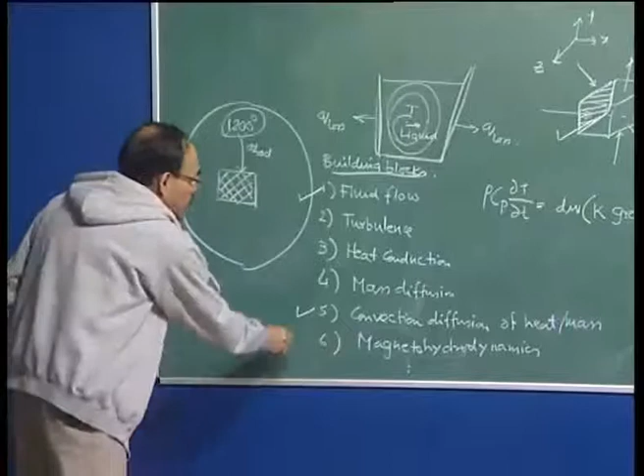So I can pick this up, and then I will have to model, because I am talking of convective heat transport. This convective heat transport I will not be able to address unless I know fluid flow. So I will have to use fluid flow, and if the flow is turbulent, in that case I will use turbulence also. So these three building blocks will provide the mathematical framework for prediction of temperature. Of course, when we talk of this convection diffusion of heat, we will require thermal boundary conditions to be prescribed.

So all boundary conditions have to be prescribed, whatever is necessary, but as far as writing the governing equations are concerned, we will select fluid flow, we will select turbulence, we will select convection diffusion, and then identify the dimensionality of the problem, whether it is a steady state or not. So from the innumerable number of equations that are available under each of these categories, we are going to pick up the right equation.

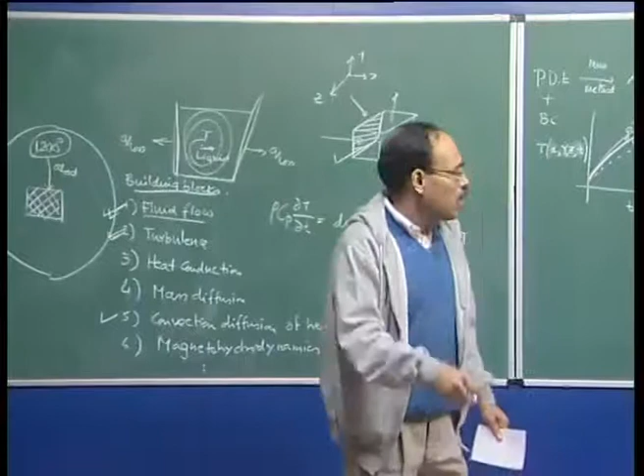So the last point that I want to make here is, we have many phenomena which we may have to calculate simultaneously. We may have to calculate, for example, electromagnetically driven flows. For example, if we want to simulate fluid dynamics in continuous casting slabs, where we may have electromagnetic braking, electromagnetic stirring, so we may have fluid flow, turbulence, heat transfer. Many phenomena can be simultaneous or interrelated. We have multi-phase flows if we are injecting gases. We have slag metal mixing. We have heat loss. We have fluid flow. We have turbulence. And if you go to continuous casting, you may have magnetohydrodynamics. So you may have many such phenomena. It is not just one.

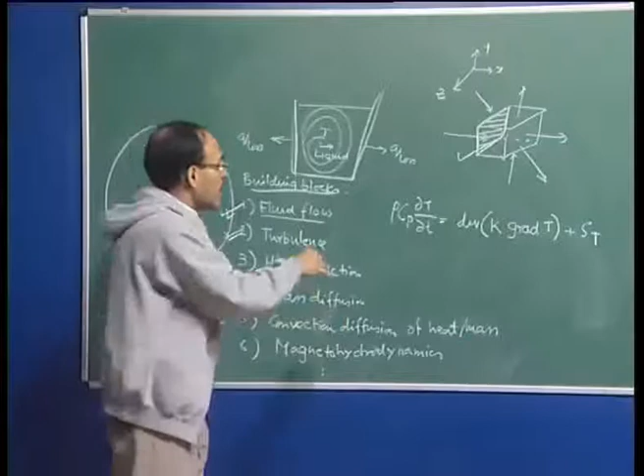In the case of slab reheating, it is just heat conduction. But when you are talking of liquid state processing operations, you may have many different, interconnected modules to be used simultaneously to predict a given phenomenon. So we are talking about solving a series of nonlinear partial differential equations. The equation is not going to be only one. There will be several tens or dozens of such equations we have to solve. And these equations are interlinked with one another. These equations are nonlinear, and the boundary conditions may be complex, nonlinear boundary conditions. So solving this is a horrendously complex task.

And if you have to write a computer program, this is going to take many months before you can write the computer program to solve this set of equations and derive a meaningful result of temperature within the ladle itself. So, what is the option? There comes the role of commercial softwares. So, today engineering training, and particularly people who are involved with steel making and process modeling, have to know what are the commercial software platforms available which they can effectively use to solve the equations.

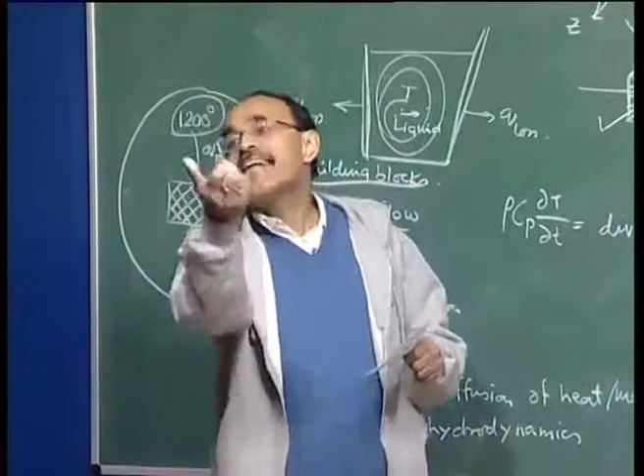So, your job ends at formulating the problem, okay, and then you configure the problem with the aid of commercial softwares. When I talk of solutions, the solution essentially encompasses writing of the equation, then coding the equation in a computer and then getting the numbers. So, this coding part can be totally eliminated if you can resort to commercial softwares. And two commercial softwares which are very popular today are Fluent and COMSOL.

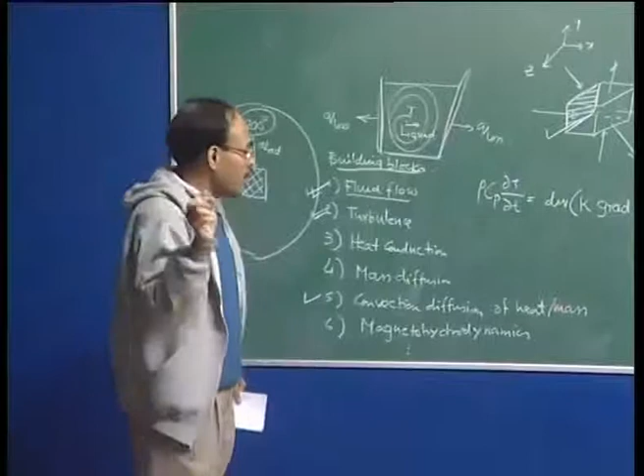So, most of the mechanistic models for steel making can be solved by using Fluent. Fluent has all these modules, all these building blocks built up. You have to just say that it is 3-dimensional, unsteady state, turbulent fluid flow, and Fluent is going to pick up the correct equations for your system from the building blocks that are in the memory of Fluent. So, using these commercial softwares, you will be able to generate the results in practically no time, and then you can post process. That means you can plot and scientifically visualize the results. How the temperature is changing as a function of time, or how the velocity is changing as a function of time in a ladle. All these features you can draw nicely, and obtain useful information of the process.

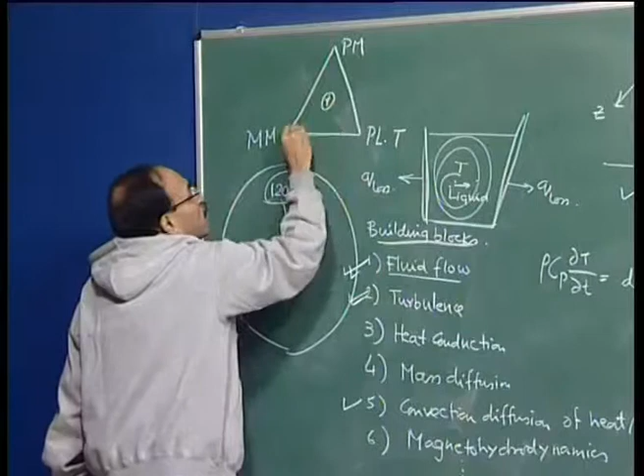So, to conclude the discussion on physical and mathematical modeling, I would say that mathematical modeling is a very important part today, because physical modeling does not give us a complete picture. So, mathematical modeling and physical modeling should be applied together, and finally I would say that if you draw a vertex triangle, in one vertex lies the physical model, in another vertex lies the mathematical model, in this vertex lies the plant scale trial, and there is the truth. And so, in order to hit the truth, you have to have these three components, and then only possibly you can do process analysis, process design, optimization correctly.

So, any comprehensive investigation on steel making must therefore embody physical modeling, mathematical modeling, and plant scale trials in different proportion depending on your resources. And when these three are combined together, you are in a position to get some meaningful results, and that is where the truth or the real process lies. And it is with this comprehensive knowledge you will be able to do process design, process analysis, process optimization, and control far more effectively.